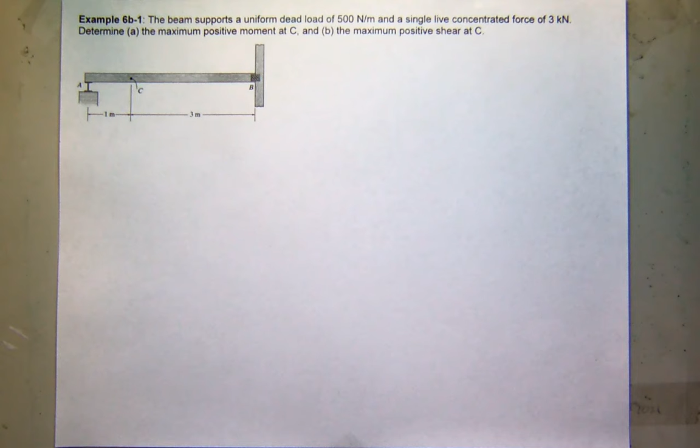So let's look at this problem. Again, we're trying to analyze this beam that's simply supported here, and I believe at B that's a pin connection. It looks like it might be a fix, but it's not. So we'll say B is a pin and A is a roller.

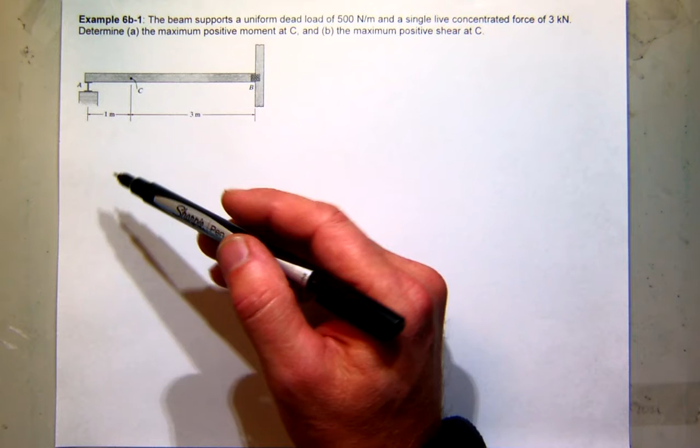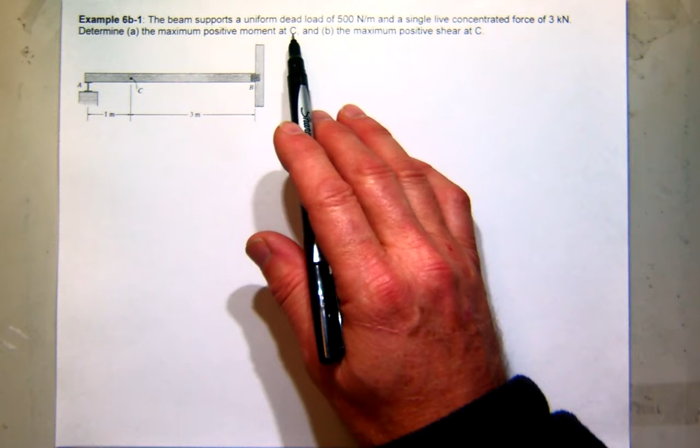Now it supports a uniform dead load of 500 newtons per meter, a single concentrated load of 3 kilonewtons, and we want to first determine the maximum positive moment at C and the maximum positive shear at C. I'll do shear first since we just did a moment one. I'll do that one just to get us started.

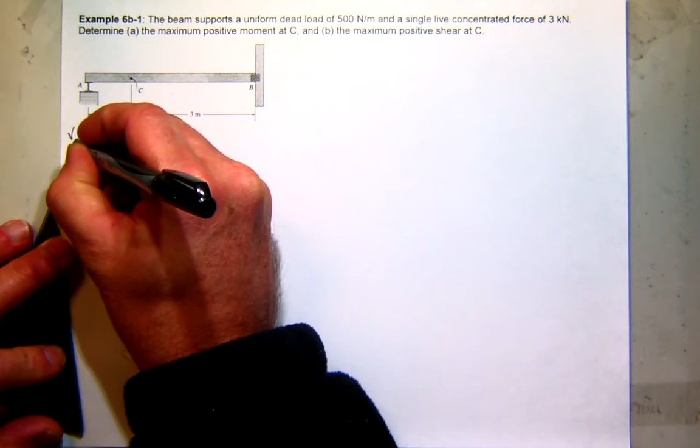So let's see if we can use Mueller-Breslau and get this. I'm going to look at the shear at C, and I'm going to go ahead and extend down some lines to show the beginning and end of the beam, and I do want to know it at C, so I'll draw a line there.

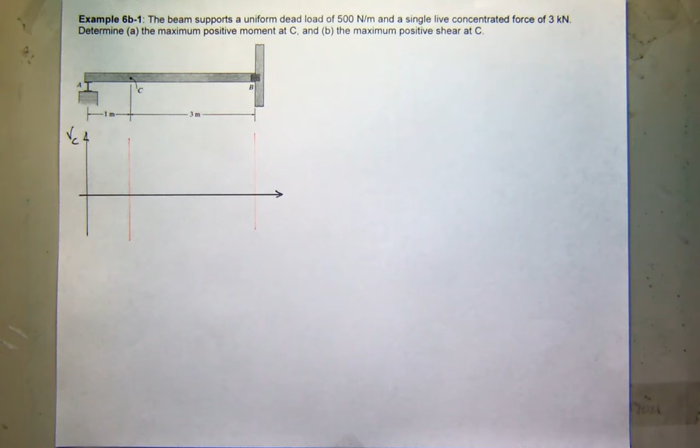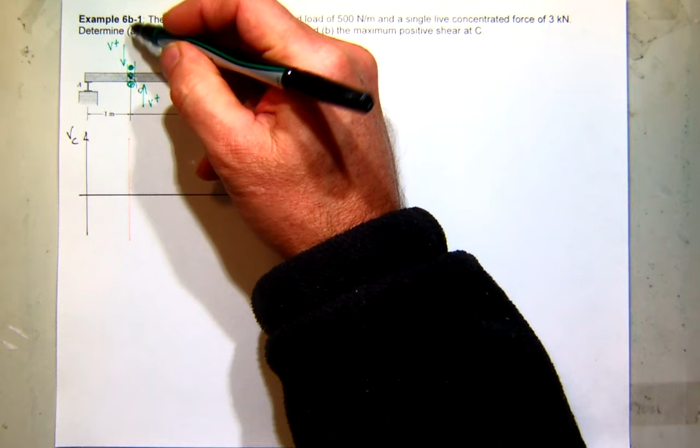Now remember what we do at Mueller-Breslau is, we come up here and we assume we have this very interesting shearless connector device, right? And we put positive shear on one side and positive shear on the other side. So looking at this left side, how is it going to move? Is that edge of the beam at C going to move up or down? Down. So I'll say it goes down here.

And we'll have a shape that looks something like that. What's going to happen on this other side? Up or down? Up. These slopes are the same.

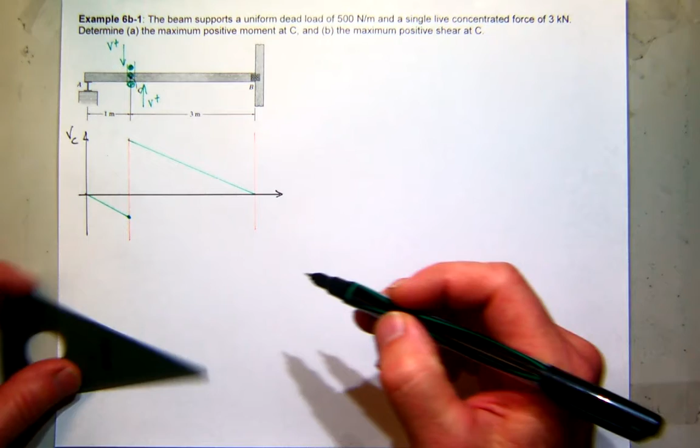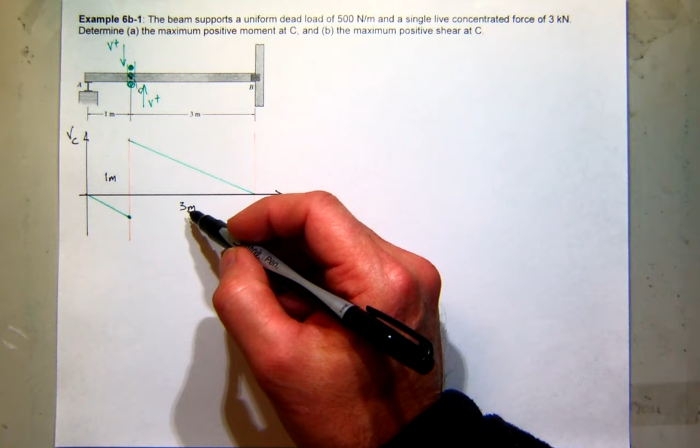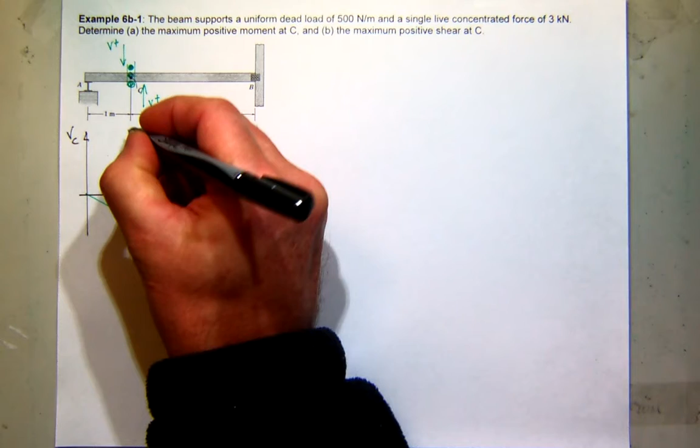Okay, so now we got some calculation to do here in our head. This is 1 meter, and this is 3 meters. So I know that this height is to 1 as this height is to 3. You can just clearly see that this value is going to be 3 times bigger than this value. So 3 times x plus x is 4x, and that has to be 1, so x is 1/4. So this is going to be minus 1/4, and this is going to be 3/4. It's 3 times bigger, and it adds up to 1.

Do I need to write that down? Is that okay? Can you guys see that? Mr. Curry, you're looking at me very strangely. Can you write it down? Are you still thinking about the lightning guy, or have you moved on? Get that out of your memory.

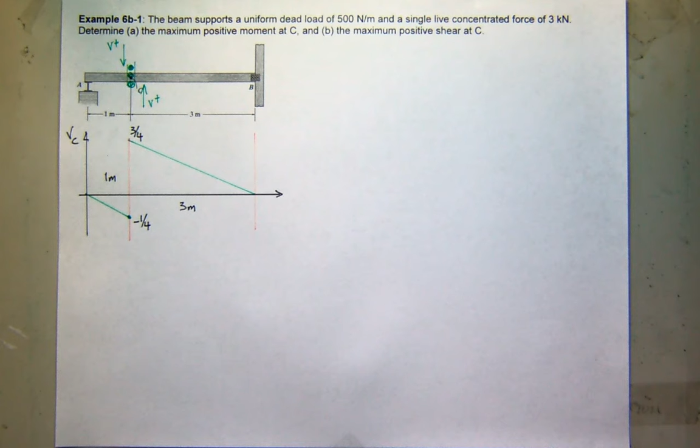So let's do it this way. Let's just say this is H, right? And we know by similar triangles that this has to be 3H, right? Why do I know it's going to be 3H? Well, H is to 1 as what is to 3. They have to be equal, so this would have to be 3H. And then, of course, you add those two together, you get 4H, and that has to be equal to 1, so H is 1/4. That's another way to look at it.

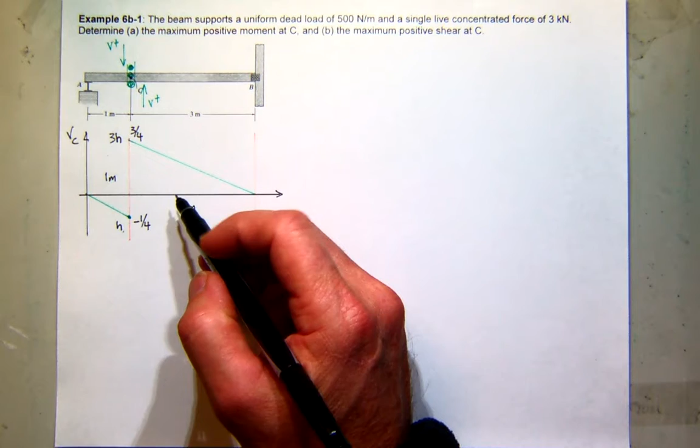I'm done drawing the influence line. What's the problem ask me for? Maximum positive shear. So where would the positive shear be? Well, I'm going to work with this positive side of the graph, right? So if we first start with, what did they give me first?

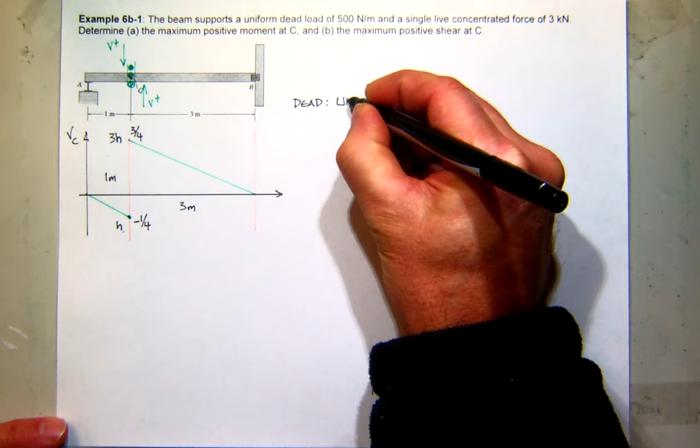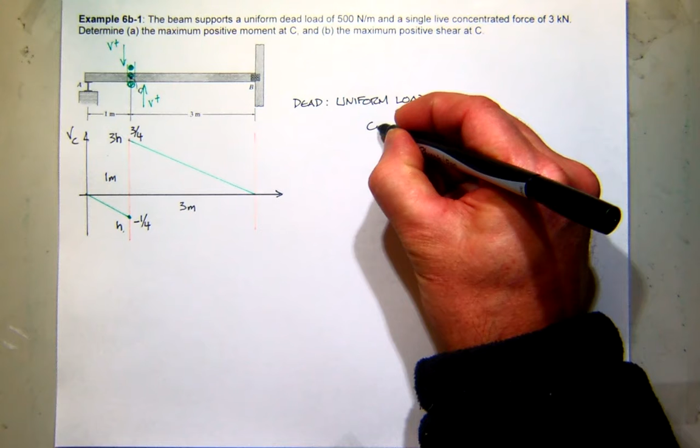A uniform dead load. Okay, so we'll start with that since it comes first. So I've got a dead load, and it's uniform, so I have to apply it over the entire structure. So I'll need the total area under this curve, and the value of the dead load is 500 newtons per meter. I'm going to change that to 0.5 kilonewtons per meter, times the area of this graph.

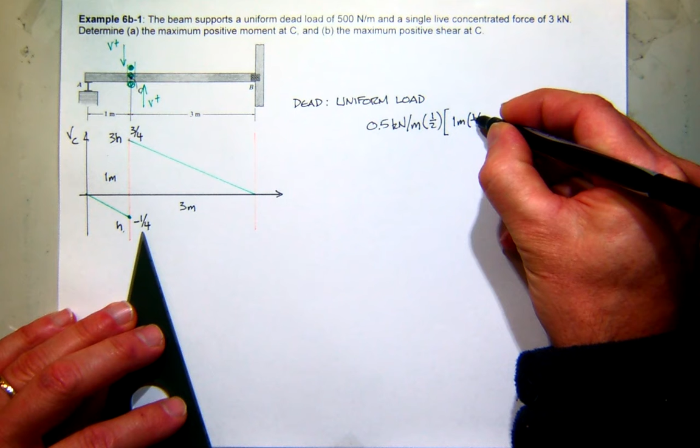So they're both triangles, so I'll have 1/2 base times height. For the first one, the base is 1 meter, and the height is negative 1/4. In the second one, I've got a base of 3 meters and a height of 3/4.

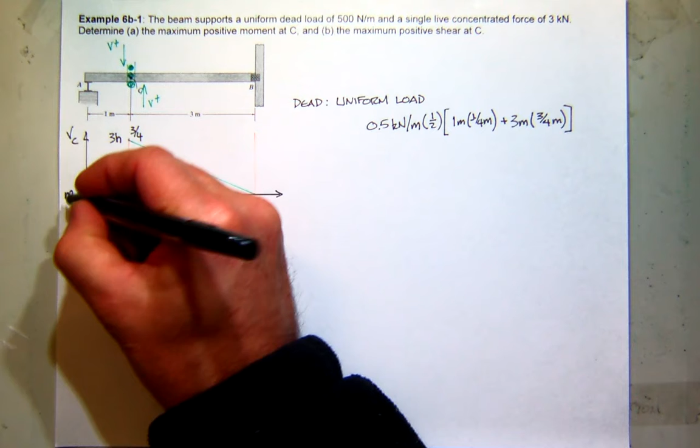Are those like a 1/4 and 3/4 in units? No, these are meters. Oh wait, this is shear, sorry, there are no meters. I was doing moment in my head. Sorry, yeah, these are not meters, these are dimensionless, because that's a shear. Did you say moment? Yeah, I thought I heard somebody saying that, so I threw it in there.

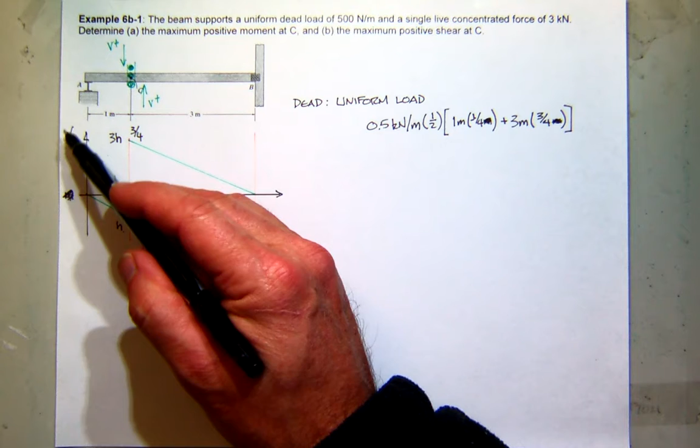Yeah, it should just come out with the unit of kilonewton. So the kilonewton per meter and all this will just be meter. What are we determining, the maximum positive moment or the maximum positive shear? We're doing shear first. This is an influence line for shear at C, so I'm doing part B first. I thought it would be the easiest one to do first. So far it has been, except for the error in units. So I don't know what that would be. Somebody's going to have to help me with that. 2, 4... I say the answer is 2, but I'm guessing.

What'd you guys get? I got 0.5. You got 0.5? I got 1 half. You got what, 100? 1 half. Oh right, 0.5 twice. That seems like a good sign. Anybody else? I got 0.5.

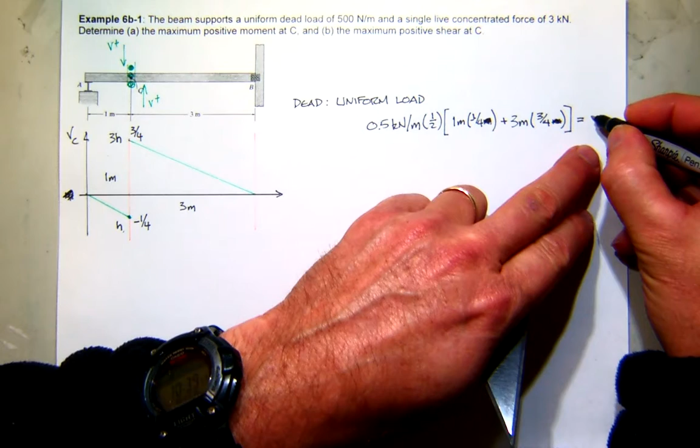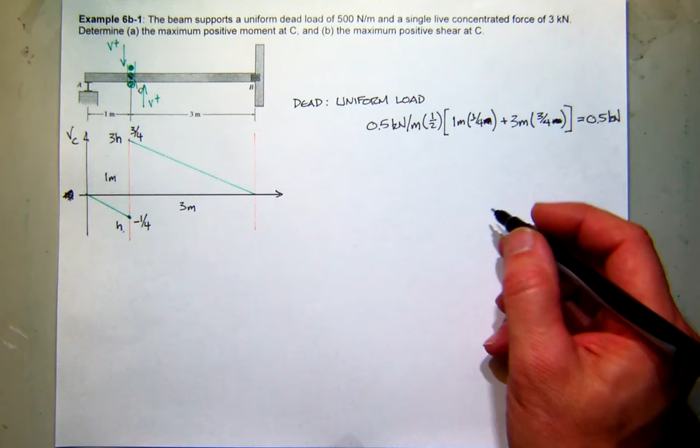So that'll be 0.5 kilonewton. All right, so next we'll do, we don't have a uniform live load, we just have a dead load and a concentrated load. So the only live thing I have on this problem is a concentrated load. And we're trying to find the maximum positive shear, so where do I put that?

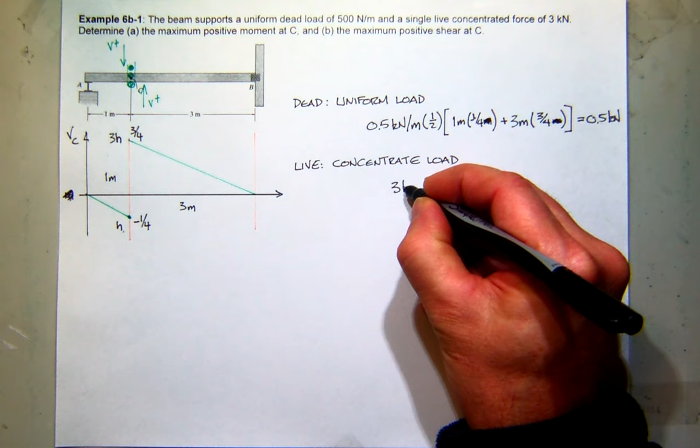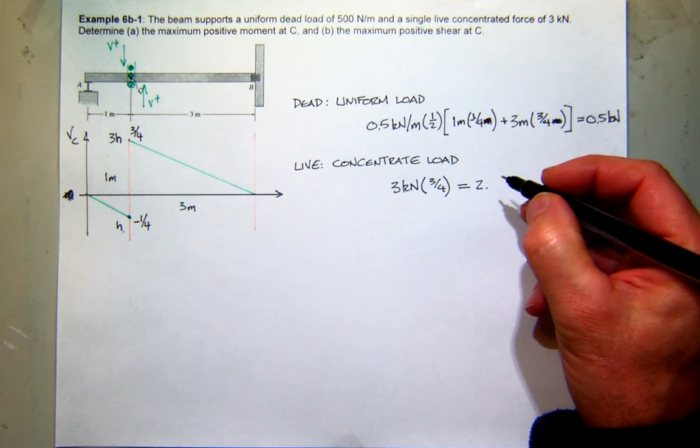Where's the positive ordinate on the graph? Just to the right of C. So I'll have my 3 kilonewton force times the ordinate, which is 3/4. And that should give me a value of 9/4, which is what? 2.25. So you add those two together and you get the maximum positive shear at C, which is those two added together, which is what? 2.75.

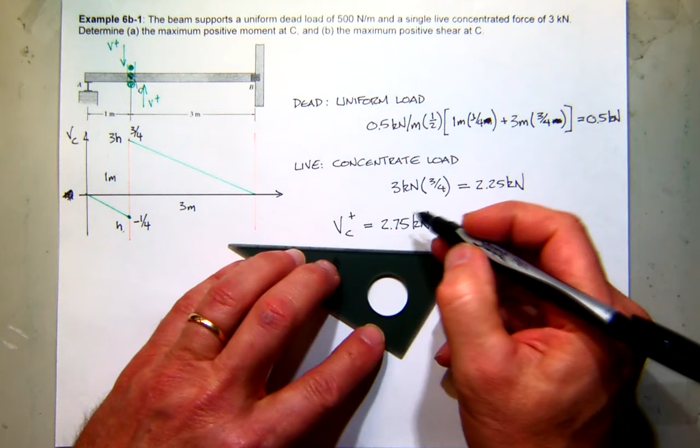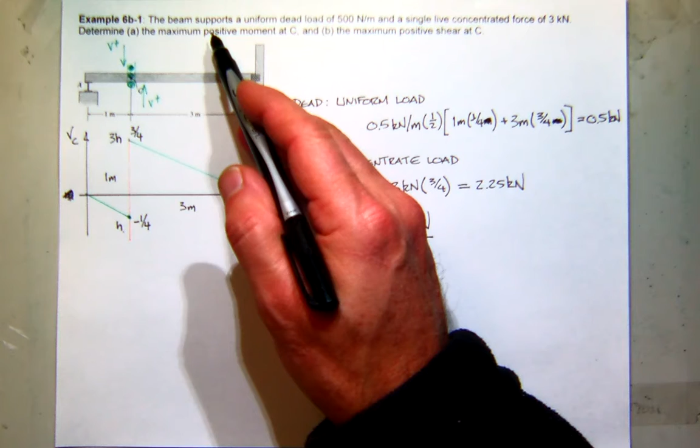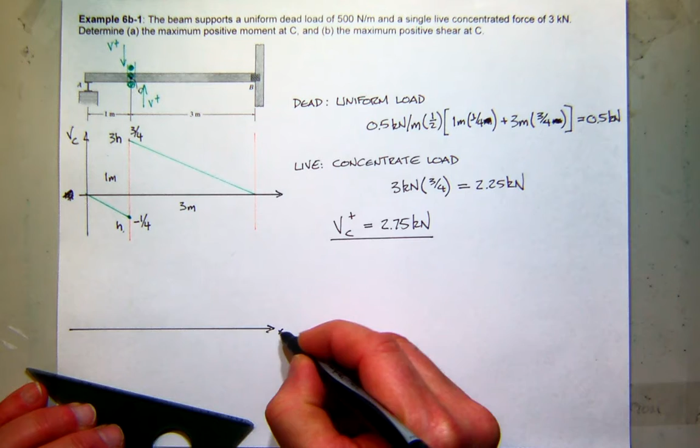Okay, so now we're going to switch and go back to part A, which is the maximum moment at C. Same spot, but now we want the moment. So let's draw a little quick template for our influence line, but now we're looking for the moment at C. This will have units on the ordinate of meter. Right, Mr. Tyler? Yep.

So there's the end of the beam. There is point C. So remember, we're going to go back up here now. We're going to put our hinge here and apply positive moment. So that point will move up or down? Up. So I'll just pick a value here. It'll swing back to A, and then this will hinge over and swing back to B. So I just need this value right here, which corresponds to my unit load being right over C.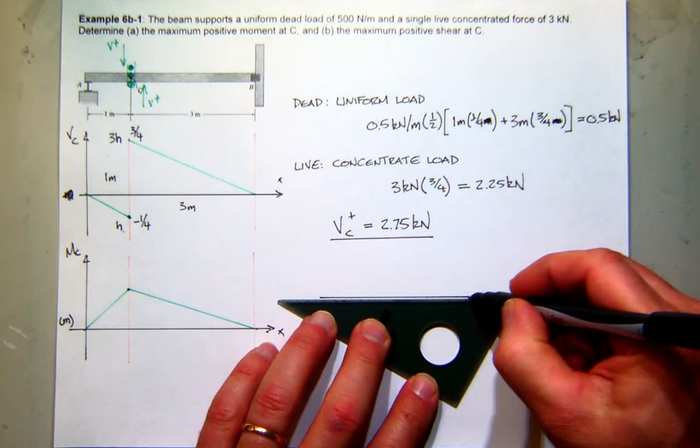So I'll come here and I'll draw my beam, and I will assume that I have a reaction AY acting up, a reaction BY acting up, and I want my unit load to be right here at C. So when you're at C, that's 1 meter, and this would be 3 meters. Now I want to also cut it at C and find the internal moment, so you can decide now whether you work the left side or the right side. Yeah, no apparent reason, I'll work the left side.

So first I'm going to find the reaction at A. I can find my reaction at A by summing moments at B, making sure it's in equilibrium. So summing moments about B, what's the moment due to my uniform load? Positive, yeah, it's a positive moment of 1 times a moment arm of 3 meters. And AY reacts with a negative moment with a moment arm of 4 meters. So it looks like AY is 3/4.

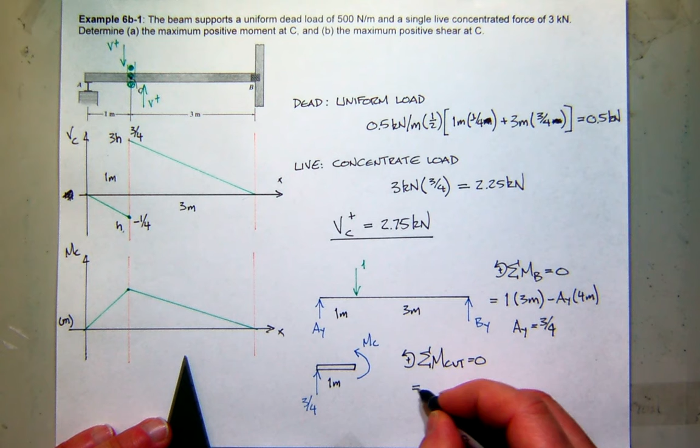So now if I cut the structure, I'm cutting it here looking at the left side. So AY is 3/4, we just found that. And I'm looking for the internal moment at C, and that's 1 meter away. So I can sum moments again at the cut, make sure it's equal to 0, and what do I get? I get the internal moment, which is positive, and this reaction is going to create a negative moment. So it looks like the moment at C is equal to 3/4. And that's weird, it's going to have units of 3/4 meters. So this becomes, oddly enough, 3/4, just like that. Are they related? No, just coincidence with the values.

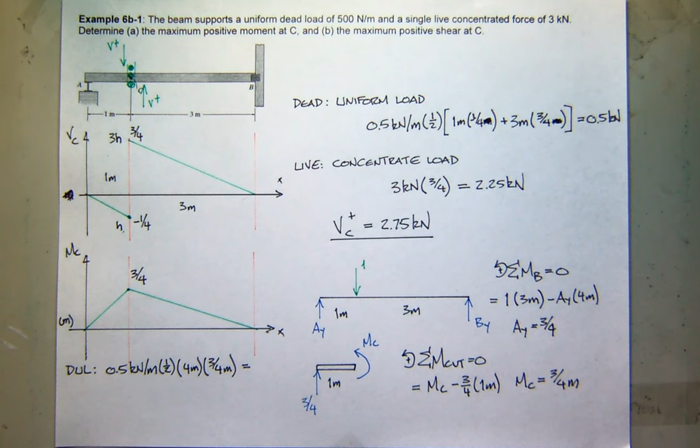Now I need to redo this part using this graph. I may be able to squeeze it in here. So let's use a little notation, I'll say dead uniform load, DUL. All right, so it's going to have a value of 0.5 kilonewtons per meter times the area of the graph, which is one triangle. So it'll be 1/2 base, which is 4 meters, times height, which is 3/4 of a meter. What's that equal to? 0.75.

0.75, so that's 0.75, and that'll have the units of kilonewton meter. And then we'll do a live concentrated load, that's 3 kilonewtons. And then what value do we choose? What ordinate value do we choose? The largest, 3/4. And that, interestingly, is the same numerical value, but it's kilonewton meters. So the maximum moment at C will be these two things added together, which is 3.

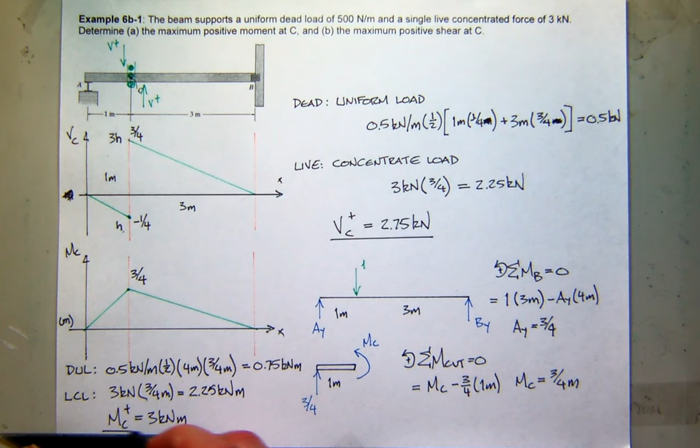How do you like that one? So a simpler diagram than the previous one, but asked you for two different things, right? Shear and moment. The other one was a little bit harder, just asked you for moment. So either one of those types of problems are valid for the exam. Other questions? All right.